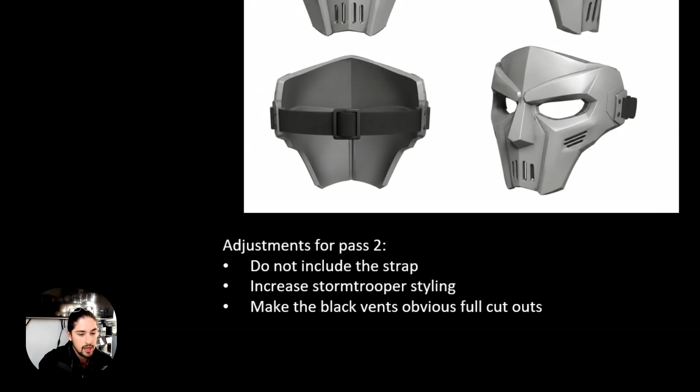So for iteration 2, my main point was to not include the strap, because I will add this in later with some string or whatever. I also asked the AI to increase the stormtrooper styling, and the last point was making the black vents more obvious cutouts.

So pass 2, after making those changes, turned into this. I was actually quite pleased with my result. So now we can move on to the 3rd step, generating the model.

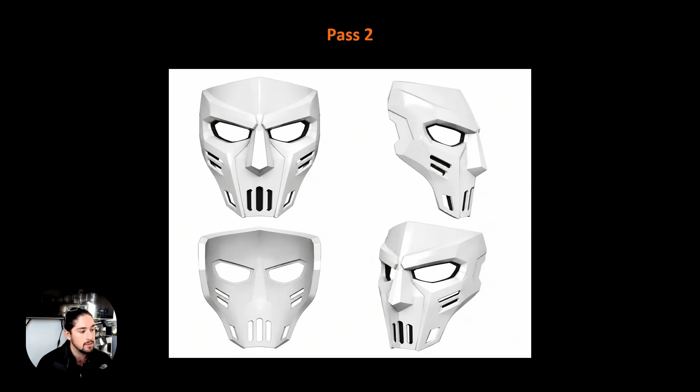Now you can use any AI program, but I like using Hunyuan because it's free. You might actually need to right click and translate to English to generate this view because it's a Chinese website, and I can't read Chinese unless you can.

Click on 3D graphics up here and then multiple images. Now this allows us to upload 8 images to generate an accurate model. So that led me to uploading my images like this, and I thought that 4 images was more than enough.

Then I selected the 1 million model face count and clicked generate. On the first try, it looks very similar to the AI generated images. Now, I was happy with this.

It's important before you download that you check and make sure that there's no weird artifacts or anything like that. Then you can select which file type you want to export. Most of the time you'll probably be going STL, OBJ, or GLB.

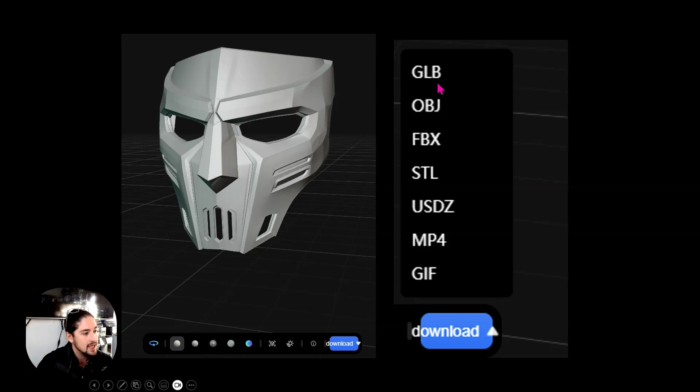GLB wasn't previously supported by Bambu Studio, but now it is. So I tend to go for GLB a lot of the time, as it is essentially an STL with textured file.

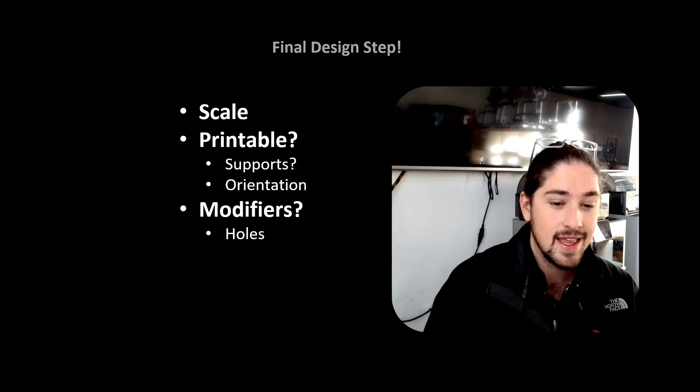Now, before we head to the slicing software, these are the steps that you must consider: we want to scale it to size. This is something that I did forget - it's a little bit smaller, so don't forget to scale it. We want to make sure that it's printable.

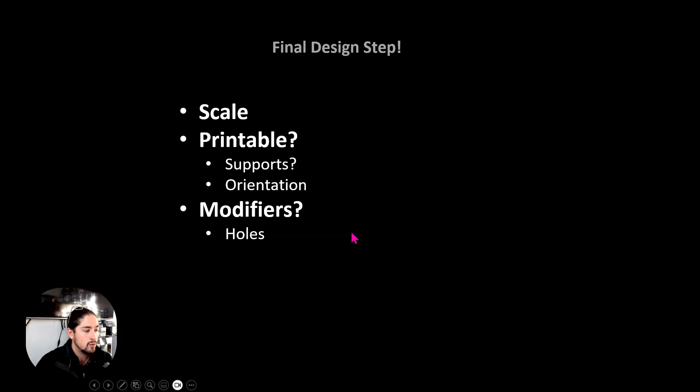So a nice flat surface to print it on - maybe the model requires some supports, and maybe the model requires some modifiers. What I mean by that is, like, you've got the strap holes there. You may want to include another part or some magnets to your mask or something like that.

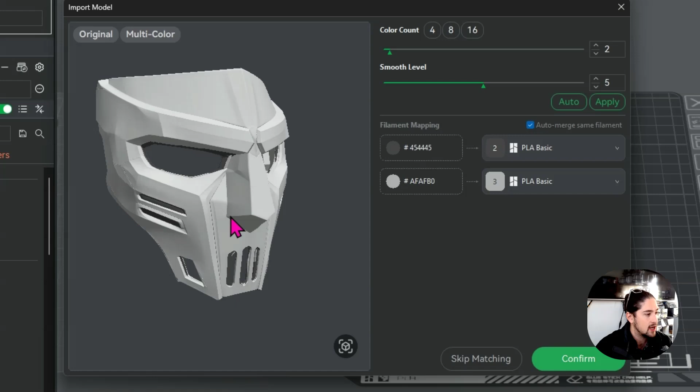So let's head to the slicer, drop it in - you can scale to millimeters. With this new GLB import, this is a screen that only comes up when you upload a GLB, and you can see that it's recognized that there's 2 colors apparently. If you had a model with 4 colors, you can start to select your filament colors and things like that. Now for this model, I'm only going to print it in 1 color.

So I'm just going to select red, and it will automatically merge them. Let's scale it down — this is the point where you would probably measure the size of your face and scale it.

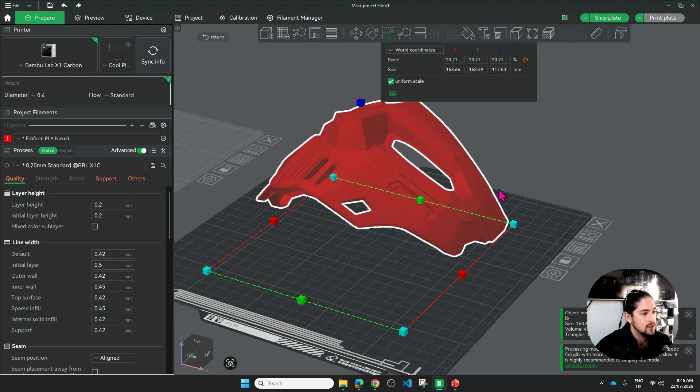When you've imported your model, you can see straight away that there's no obvious way to print this. For me, the top here came to mind as the most flat section, and when you click on 'lay on face,' it can give you some clues — it looks quite flat up here.

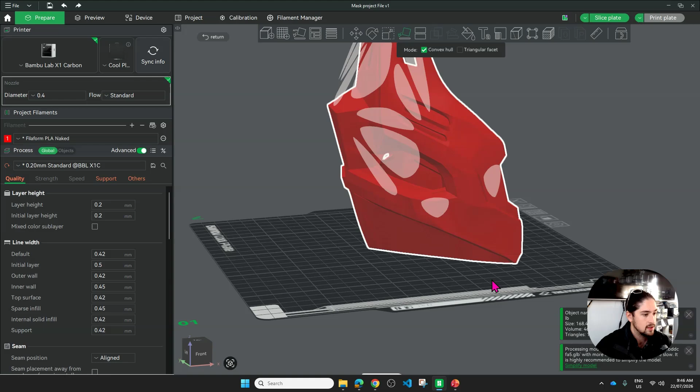Now that we've got the mask oriented, we want to make sure it's flat, so we can make a quick cut. See how if we didn't make this cut, the first layer would look like those white outlines there, and that's not ideal. So I'm going to make a cut right there, remove the purple section, and perform the cut. Now it's guaranteed that we've got a nice flat surface to print on.

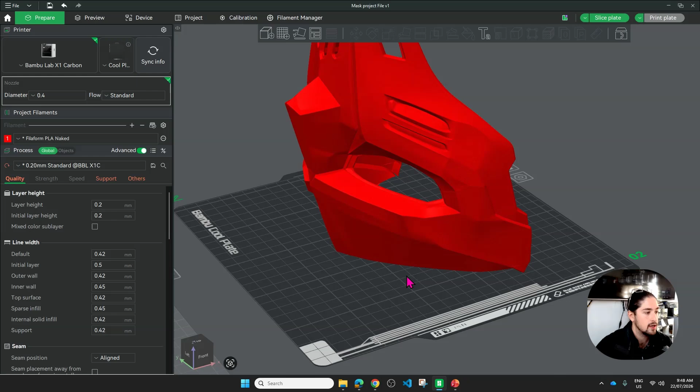Before I click slice, I'll show you some settings I pretty much use on every print. These should be on by default. I use Arachne for essentially every print. I'd usually change the infill, but for this one I left it since it's quite a thin model and I didn't want it to be too weak.

The next point is supports. You can see there might be some sections that require support, so I've just ticked that and left everything else on default settings.

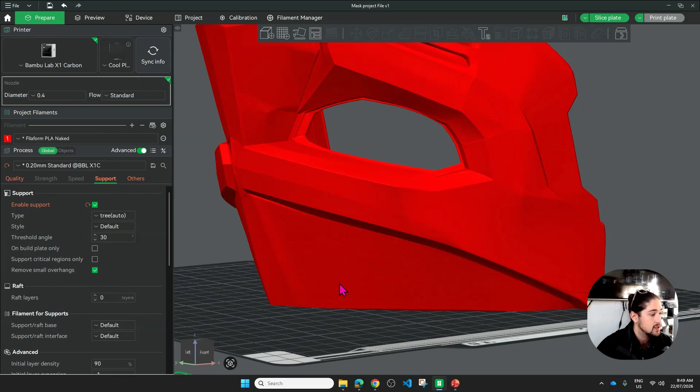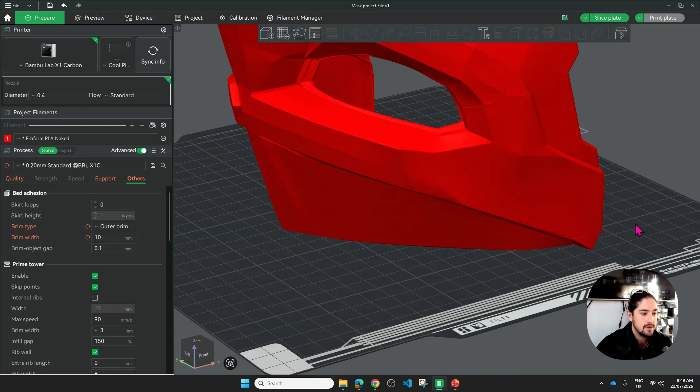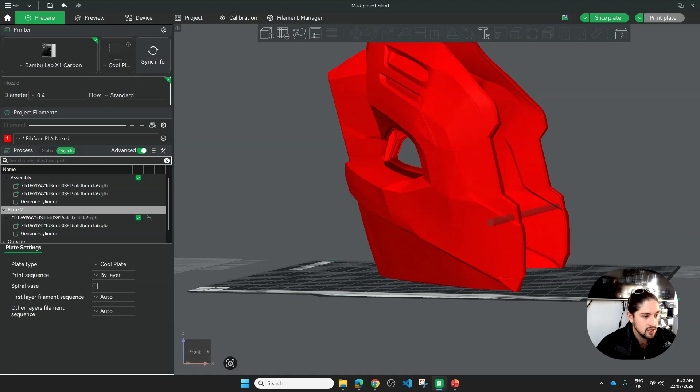Once I did that, I wanted to add the holes in, which can be done simply by adding a negative part. I set the size to 4mm and made it very long to ensure it cuts through, maybe even longer — the whole size of the bed — and positioned the hole where we think looks good, maybe right on the edge, further down or something like that. We can make sure it's going through both sides of the mask.

Now the mask is all done — that's all the steps required. You can hit print, and that's really the power of 3D printing: you can go from an idea to this thing you're holding in your hands really quick.

I'll give one last bonus tip. Something I noticed — you can use this measure feature up here, the ruler, and I realized when I clicked slice that it was really thin. If we measure the thickness of this, it's like 1mm.

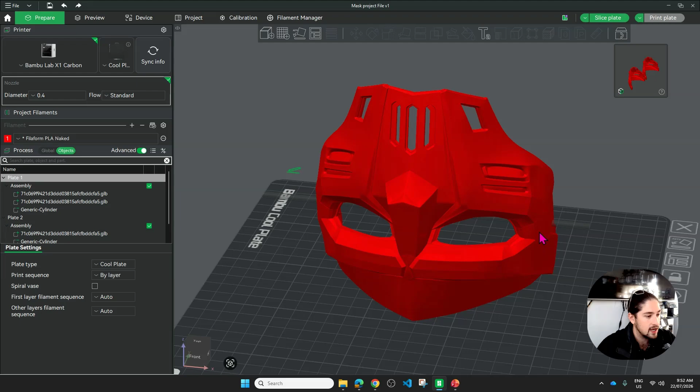So one way you can thicken this up without starting the whole process again and asking ChatGPT to generate a thick mask and all that — you could do this trick where you take your mask and copy and paste it. Let's just name them so you can see: there's mask 1 and mask 2.

You can see here that mask 2 is living exactly in the center of the other one, and if you just move the mask ever so slightly, you can increase the thickness of your part without starting from scratch again. We all know that modifying AI parts can be quite annoying.

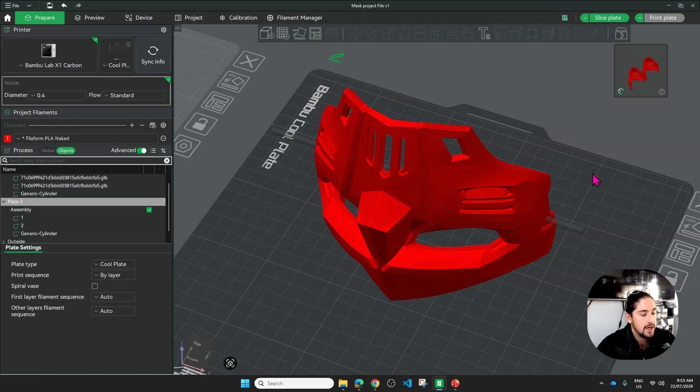Now, it might not work if you don't have your parts merged, so you need to make sure they're already merged here since they're in the same assembly tree. But if they're not, you can highlight both, right click, and there'll be a merge button.

So there it is today, guys — from idea to 3D model in about 10 minutes. And this can apply to any idea you have, not just masks.